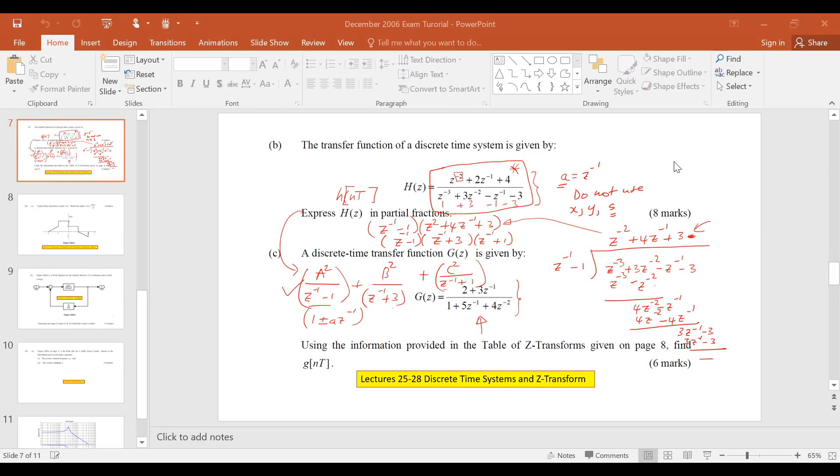So where were we? Last time we did all the things with the Z transforms and so on. Of course, you have to sit down. There are problem sets and there are past papers to try the questions and see if you get the answers. If something doesn't make sense, then come back and let me know. If something in the solution is not making sense, then again, come back and let me know as well. All right, so let's go ahead here now.

So today's topic has to do with something that was discussed early on in the course, which had to do with piecewise continuous signals. And really the lecture was about step responses and impulse responses and so on. In the continuous time domain, we're dealing with a continuous world, and the signals, whatever you have coming from sensors and the like, are supposed to be continuous.

So this part of the course was really trying to get through to people what happens, what is imposed on a system when these discontinuous signals appear. And now we have the benefit of hindsight in that we've done the entire course. And we know that when we are testing systems, we make use of the impulse response.

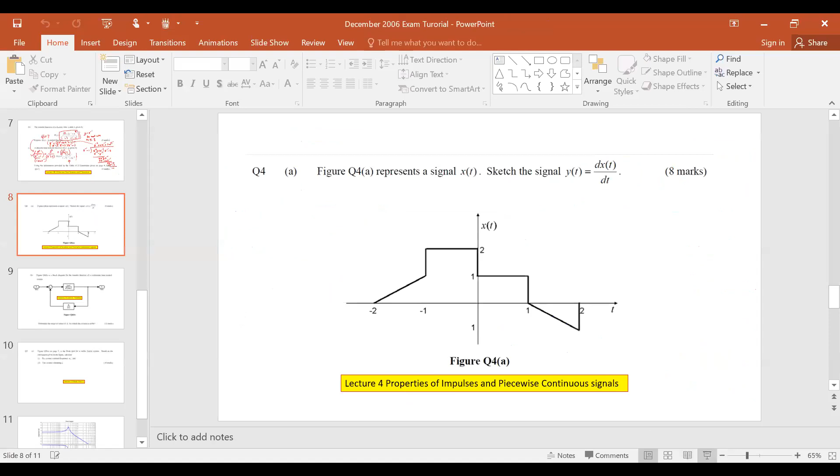So with that in mind, let's see quickly how to answer the question. Right, so let me clear some of the little stuff out of the way. So the particular question now is asking us to sketch the derivative of the signal. So this is going in, and the system is working a derivative. So it's a derivative controller, and you'll see what that means when you're getting into your controls.

But simple now. If I ask you to find the derivative of the signal, because it's piecewise continuous, you have to break the signal up into sections. If you look at it, between -2 and -1, in these spots here, right? Just give me half a second.

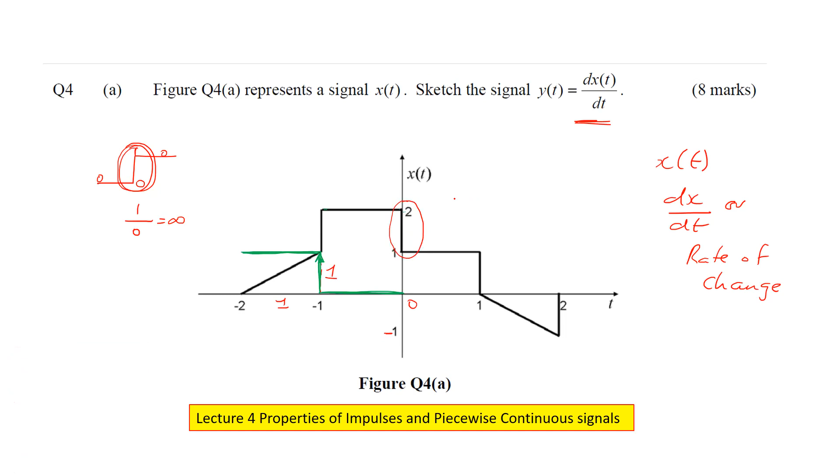At this point now, right at t equal to 0, again, we have a step change, and this is a step going this way. The amplitude is from 2 to 1, so it is a unit step, but it is going negative. So again, it is a sudden change, just like this one here, except that the impulse changes in the negative direction. So that's going to give us an impulse going this way, a negative going impulse here. Between here and here, nothing.

Here we have yet another impulse. Yet another step change. So here is a step going from 1 to 0. So the rate of change of that is another impulsive change. It's negative because it's going from 1 to 0. So if you draw it out, the dx/dt for this point, again, it's an impulse of height 1, right?

And then here now, between 1 and 2, what's the slope of this line? What's the slope of that line? So that would be -1. Exactly, right? So -1. Hello? Yes, yeah. -1, fine. So right here now we have a -1 line. And then at this point now, this is a step change, and we're going from -1 to 0. So that's a positive going step. So at this point in time, we're going to have another positive impulse, okay?

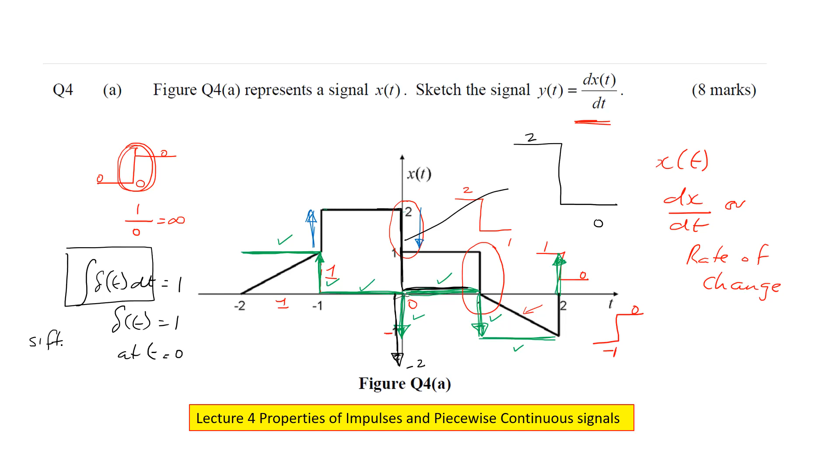And we used this in that chapter to develop this property that we've made use of so many times now, which is the sifting property. Okay. All right. So next bit.

Right. So this question now, part B. Part A just had to do with the signal itself. Part B had to do with stability, and the particular discussions took place in lectures 23 and 24. So we'll have a little look at that and then come back to the problems. This problem actually is a simple block diagram simplification, but making use of the stability issues that we talk about in lectures 23 and 24.

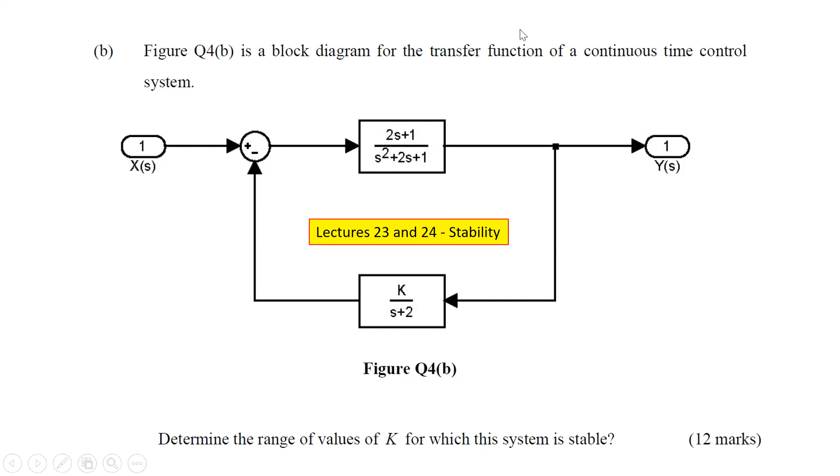All right, so let me just stop this and then stop the share here. And let's see what these lectures were trying to tell us. Uh-oh. Wait a minute, I actually have the recording going on. Okay, one second, let me stop this. How do I stop my own recording? Okay, I'll have to play it without doing that because I did a recording for you all, but I think the recording is on the slides itself. If you remember, I couldn't attend class that particular day, so I did the recording ahead of time for this one. So let me not view it. You have the recording and you have the videos and the slides available.

All right, so one of the things about it is that stability is a big issue in systems, in any kind of thing that you design, whether it's electronics, telecommunications, energy, controls, or whatever. What you want is always that if the system has an input, you get a stable output for whatever you put in. And there are a number of ways that you can determine that, but the main idea is that the output is bounded.

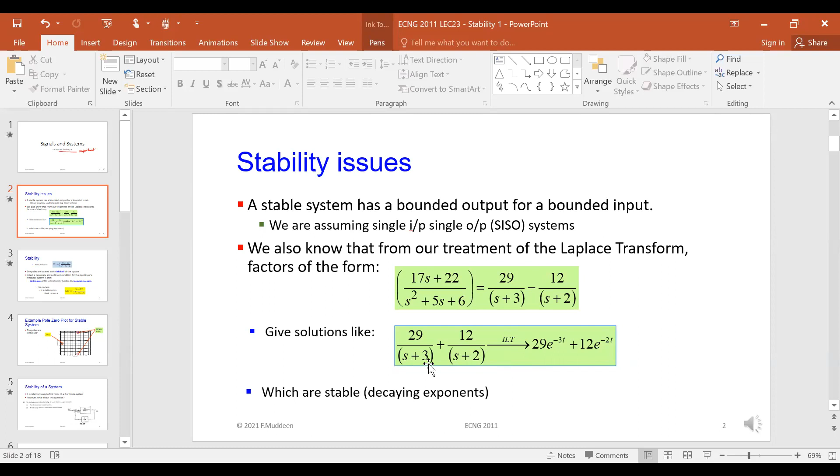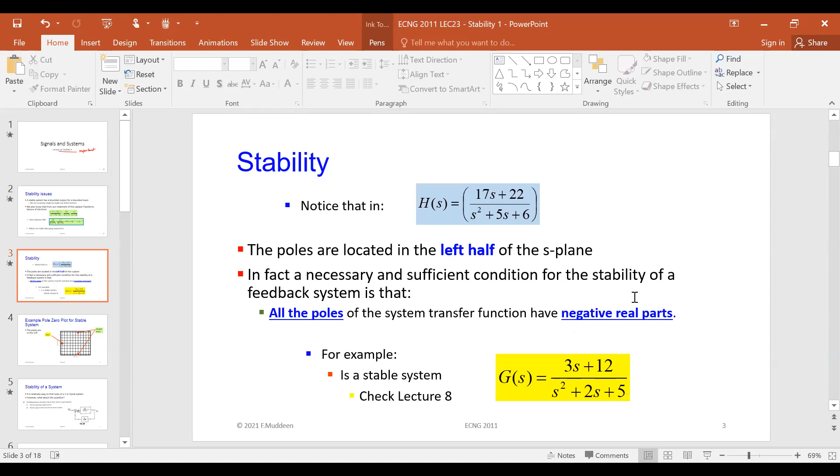So from how the transfer function looks, once you can get the answers in the Laplace transform domain, you will be able to see answers of these sort of forms where you have the poles S plus something, where the poles are, in this case, S equal to -3, -2, and so on. In other words, once the poles have negative real parts, the system is stable. It drops into the left-hand half of the S-plane. If you want, you have the transfer function, you could go and plot the poles and see, once the poles are in the left-hand side of the S-plane, the system is going to be stable.

So suppose we have a system that has a gain, some gain factor, and most controls and most systems that you design have a gain function on it that you can adjust. A simple thing, like in electronics, an amplifier has a volume control. Volume is in fact the gain of the amplifier. So if you have an amplifier, you have to be able to increase the volume from nothing to the full output of the amplifier without the amplifier overheating, saturating, blowing the speaker.

I don't know if you've ever been in a fete or some get-together where they have these high-power amplifiers going and they blow the speakers, right? It's not a pleasant thing, especially if you happen to be close to the loudspeaker. It's expensive. You also risk damaging the amplifier. So you don't want that kind of thing happening. That is a kind of unstable behavior. In that case, you overloaded not the amplifier but the speaker, and you took the speaker out. But you don't want the amplifier itself to do the same thing. You don't want the amplifier to start to smoke and just blow on you, right?

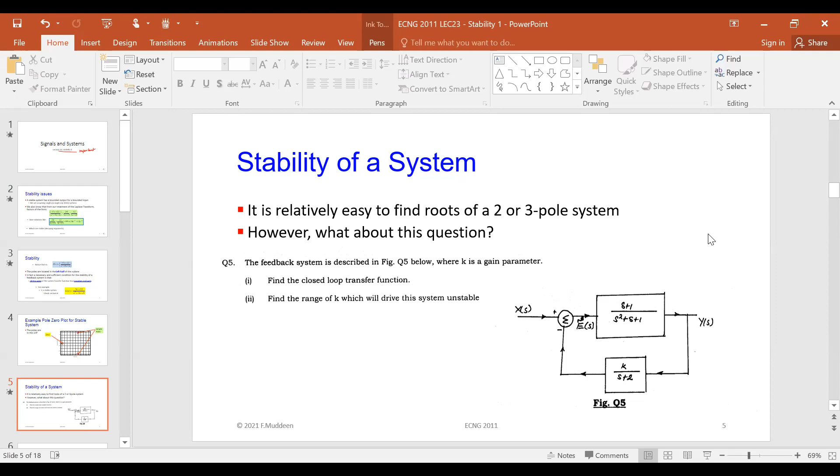So if you have a model of whatever you're dealing with, is there a way, without having to solve for all of the roots, that I could find out whether the system is stable or not, right?

And the technique that we use is something called the Routh-Hurwitz stability criterion. And it has to do with being able to see what the poles of a transfer function do without finding the value of the poles. It's easy enough if you only have 2 poles, a quadratic, or even 3. You could probably solve that by trial and error.

But if you have a system, as most systems do, where you have cascaded systems and each of them is a second order, at the end of the day, you may have something with 5 and 6 poles to handle. And you can't sit down with pen and paper and solve something with 6 poles very easily. So how do I get around that? How can I see what the poles of the system do?

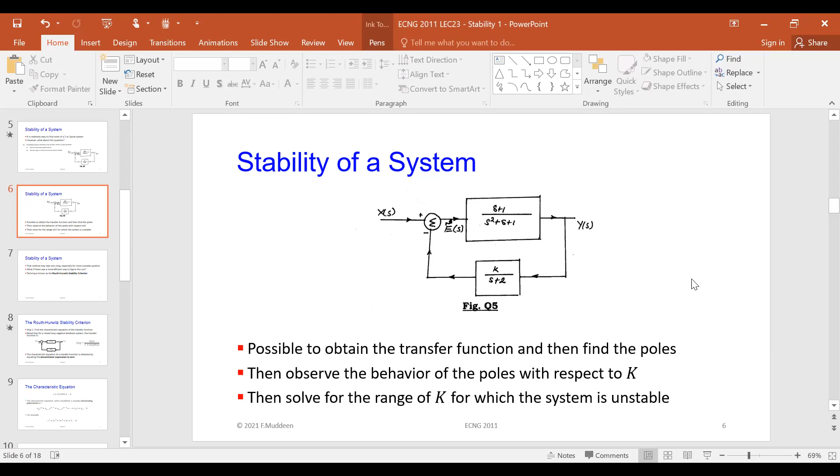And specifically, if the poles happen to be in the left-hand side of the S-plane, which is all I'm interested in, nothing else. So this is where this technique called the Routh-Hurwitz criterion comes in. And it is based on some polynomial theorems that we're not interested in. Right now, as I told you in the recording for the class, the actual technique itself is just strictly to do with the behavior of the poles in the system. All right.

So step 1 on this, I think the recording stopped at this point in time, is to find something called the characteristic equation of the transfer function. Whatever the block diagram is, at the end of the day, you get a transfer function that is going to look in its simplest form as some G(s) over 1 plus G(s)H(s). This particular bit here, the denominator expression, if you set that equal to 0, the 1 plus GH, I'm forgetting the S for the time being, equal to 0, we call this the characteristic equation of the transfer function.

And remember, all the poles of the system are here. When you simplify this entire system, all of the poles of the transfer function are located in the denominator. The numerator has the zeros. Zeros are all right because zeros just mean the system shuts down. It doesn't go to its extremes. So we could worry about the zeros afterwards, but the important thing to find out if something is stable is to figure out what the poles themselves are doing.

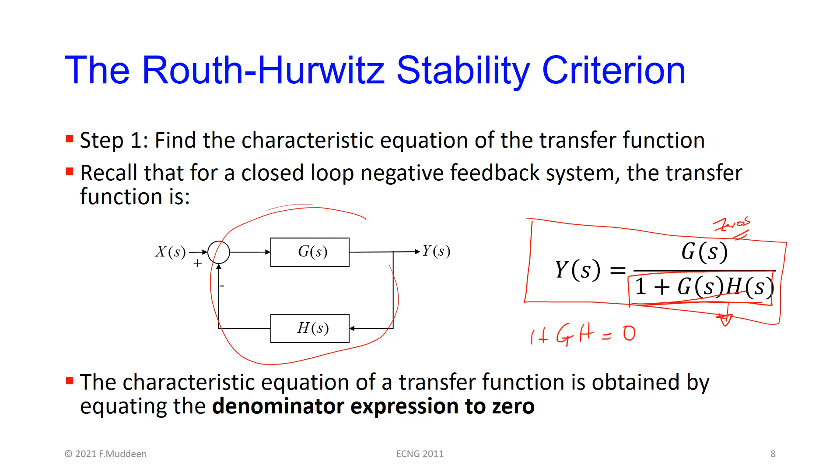And once you have the characteristic equation, the characteristic equation is a polynomial in S, right? Because we're dealing in the S domain. This is a typical example here of a 4th order one. It could be 3, it could be 5, it could be 6, it could be 2, anything like that. But at the end of the day, when you simplify the 1 plus GH, you're going to get an equation that is a polynomial in S, okay? And if it isn't in descending order, you want to get it in descending orders of S.

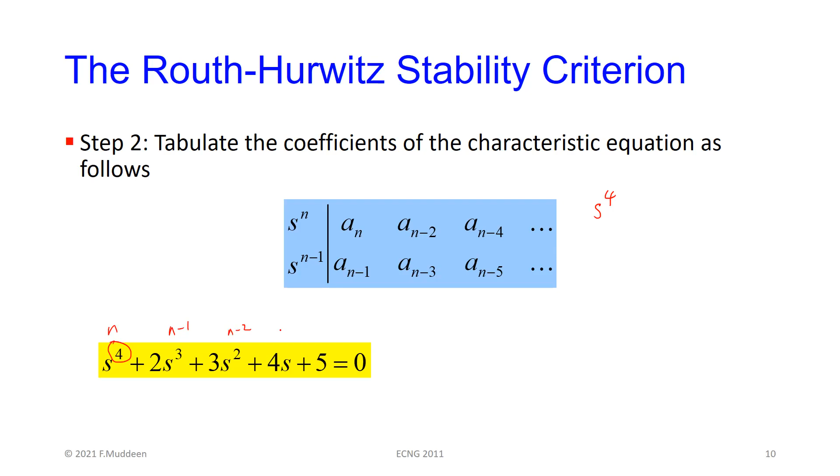All right? And then the stability criterion is that you simply tabulate the coefficients as follows. So for instance, if this is a fourth order equation, the first row you put is S to the power 4, N is the highest order here. So this is N minus 1, N minus 2, N minus 3, N minus 4. And the coefficients here, this is AN, AN minus 1, AN minus 2, AN minus 3, and AN minus 4, right? So you tally the coefficients according to what we're saying here.

And you draw up a table, and in the first row of the table, you put the coefficients for AN, which in this case is 1, AN minus 2, which is 3, and AN minus 4, which will be 5. And in the S3 row now, so if you do S4, you're going to do S cubed next. And then you start with the coefficient of S cubed, which is 2. And then you skip 2 again, and you go with the coefficient of S, which is 4.

So this is the starting point for the tabulation process, right? And for completion, you could put a 0 here. It's optional, but any blank is treated as a 0, all right? So the next step now is to do the manipulation from what they call the Sturm theorem.

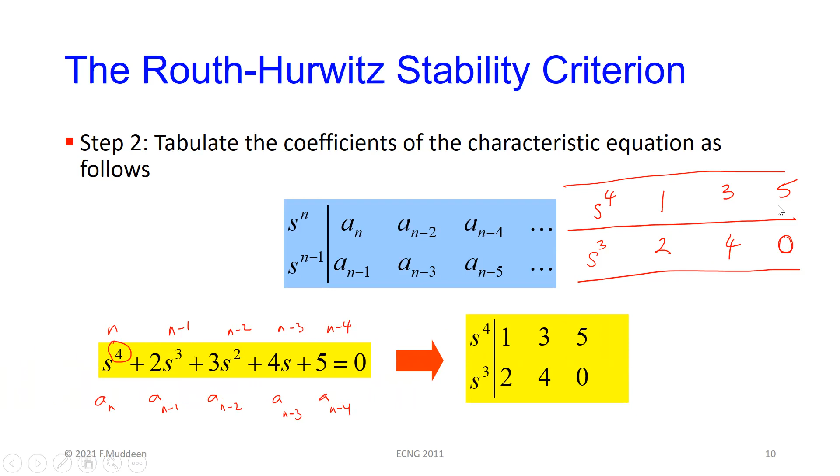So we have to tally this one, right? So we use 4 and 3 to give us 2. And then we're going to use 3 and 2 to give us 1. And then we're going to use 2 and 1 to give us 0. Right? So you're going down, and every row that you want to tabulate, you need to look at the 2 rows above it. So the S1, you need to look at the 2 rows above S1, which will be S squared and S cubed, okay?

And the manipulation is that to calculate the coefficients for a particular row, like for instance where we are right now in this row here, the next step down, to calculate the first value here, we go to the row above, and we're going to take this and multiply it by this, and subtract this multiplied by this, and divided by the first value here.

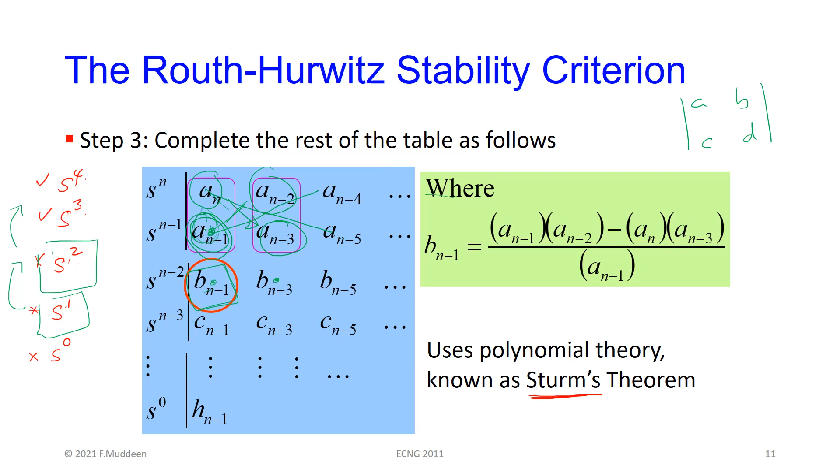So for this bn minus 1, for this one here now, we're still going to start with the one above, and then we're going to do here minus here divided by an minus 1. So it's always going to start with the first value here. And so you keep going. Right? Bn minus 3, as you say. So you're always going to look at here, and especially keep your finger here. And bn minus 5 would have started with these and then looked at the other one if we had another pair on that side. And so you keep going.

All right. The important thing is to use plenty paper. Don't try to complete the table in one shot. You make mistakes. Remember when I was doing the December paper review with you, I made a mistake because I was trying to do it on the screen here. And because of space and not erasing the table on the screen, I ended up using the wrong value. So I put in a value and one of you all pointed it out to me.

So this is a table that we're trying to complete, but you're doing it in sections. Forget the lower part at this point in time. So you would calculate S squared and you do the calculations here. So on your paper, you would have had that this particular value here would have been 2 multiplied by 3 minus 1 multiplied by 4 over 2, right? Which is 6 minus 4 divided by 2, which will give you the 1. And then the other one, 2 by 5 is 10, minus 0 divided by 2 will give me 5. And you write it over like this now.

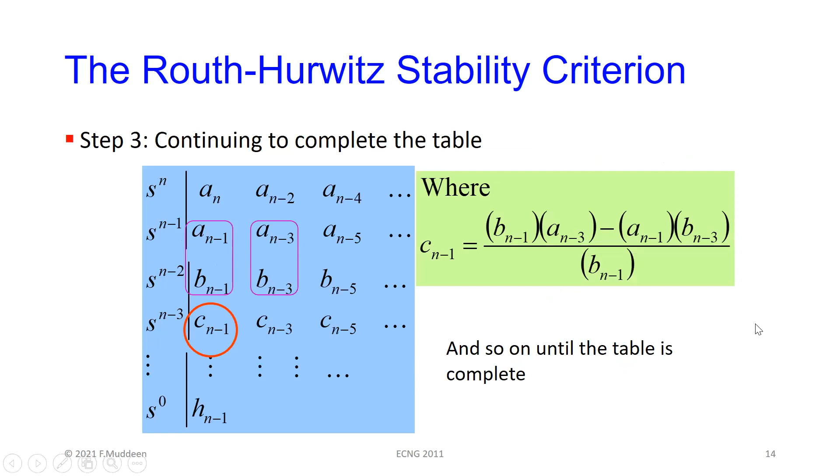So after you've done the calculations, we draw the table with, in this case, S cubed and S squared. And then the next step now is to calculate S to the power 1. You do the calculations, and then you draw over the table now with S to the power 4, 3, 2, and 1. And then you complete it. So the one below here, S to the power 1, let me just clear the screen a little bit.

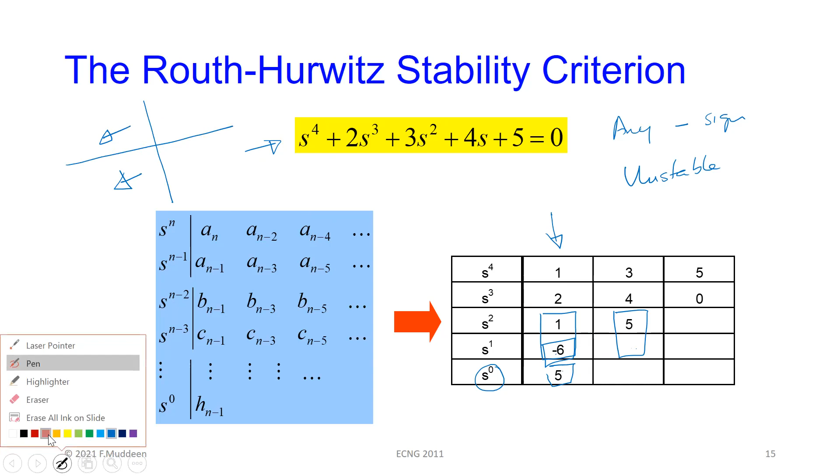And what this means is that if this system is not stable, somewhere in my S-plane... if they were stable, all the poles were going to be here. Somewhere in this system, we have a pole on the right-hand side, a pole or poles. Luckily enough, the technique gives us another little hint in that the number of sign changes,

the number of sign changes tells us how many poles have positive real parts. This system has 4 poles. The number of sign changes in this column is going to tell me how many of those poles are in the right-hand side of the S-plane. And you determine the sign changes by going down the column. No sign change, no sign change.

Here to here is a sign change from positive to negative. So this is one sign change. And here to here is another sign change from negative back to positive. So this is another sign change. So this thing has a total of 2 sign changes, which means that of the 4 poles, 2 of them are located in the right-hand side of the S-plane.

Yeah? So as simple as it is, with the technique, without solving the equation, you are actually able to see, 1, whether the system is stable or not. In this case, the system is unstable. And 2, the number of sign changes is telling me how many of the poles are on the right-hand side. And if you were to solve this and draw, notice that the S-plane here,

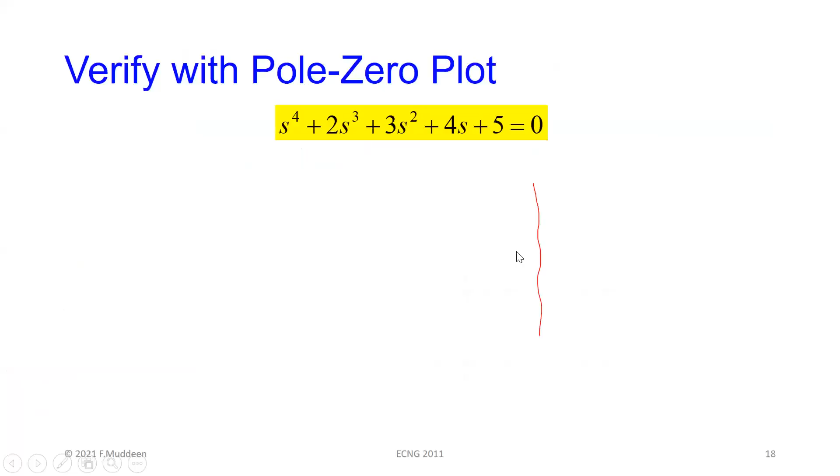Right. So you have the line, and I'm drawing just as crazy as I had before. Can't seem to get it straight. Okay, so that's 0. That's the S-plane line here. Right? And if you look at it now, the 0, 0, all of this on this side is right-hand side.

So anything across this 0 line means that that particular pole, you remember, a real part means that you have an e to the plus at when you find the inverse Laplace transform. So this part of it is going to give me an increasing exponent in the time domain if I were to solve the equation.

All right. So the technique, so you don't make any mistakes, as I say, calculate the row and write over the table. Calculate a row, write over the table. Right? You have paper inside of here, and it saves you a lot of headache, especially in one of the examples that we were doing. Right? So the other part of it now, that's all well and good.

But there's another section now. There are a couple of exceptions, and we'll talk about that. Right? When you're doing the criterion, there are a couple of exceptions that you have to deal with. And the two exceptions are, one, if when you do the calculation, you get a 0 in the first column. Remember, this column is the important one.